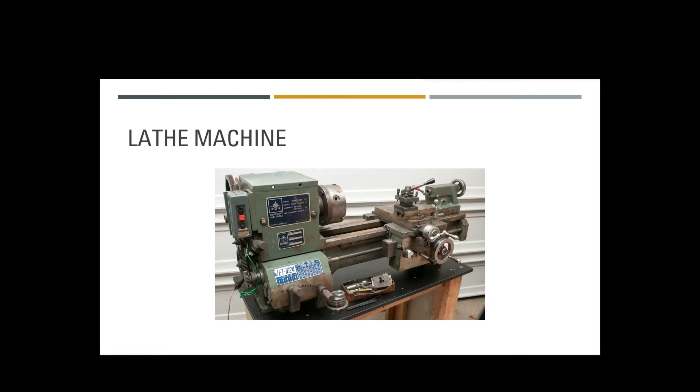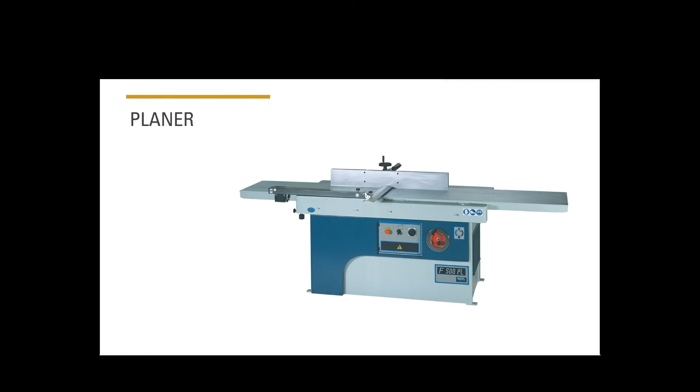Planer: machine tool used in the production of flat surfaces on pieces too large or too heavy, or that cannot be held in a shaper. The table on which the work is securely fastened has a reciprocating motion.

Grinding machine: a machine tool in which an abrasive wheel is used as a cutting tool to obtain a very high degree of accuracy and a smooth finish on metal parts, including soft and hardened steel.

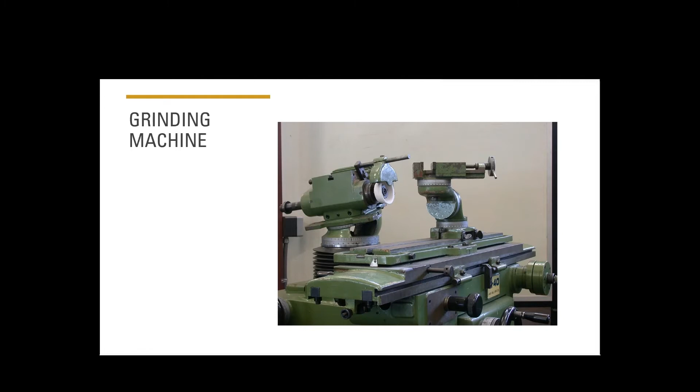Vertical boring mill: a machine tool purposely designed for finishing holes. The work table revolves on a vertical axis, and the cutting tool is arranged above the table and may be fed laterally or up or down in any position.

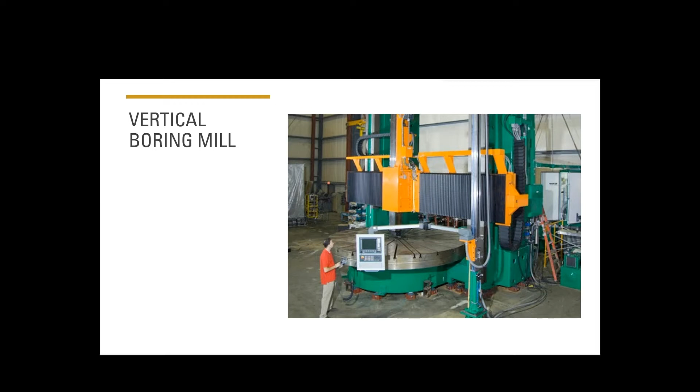Horizontal boring mill: a machine for finishing holes where the cutting tool revolves on a horizontal axis. The spindle which carries the cutting tool may be fed longitudinally through the spindle head, and in more recent designs, the spindle head may be fed vertically.

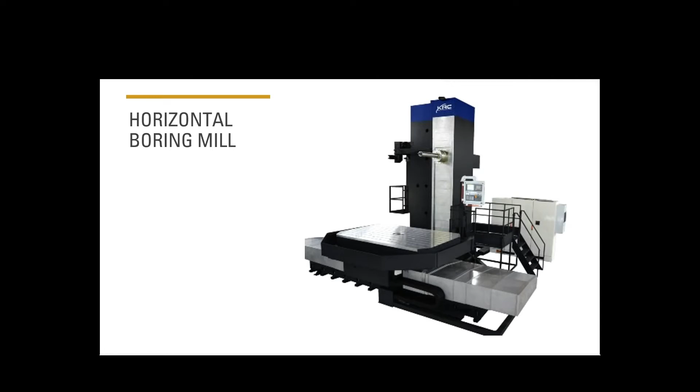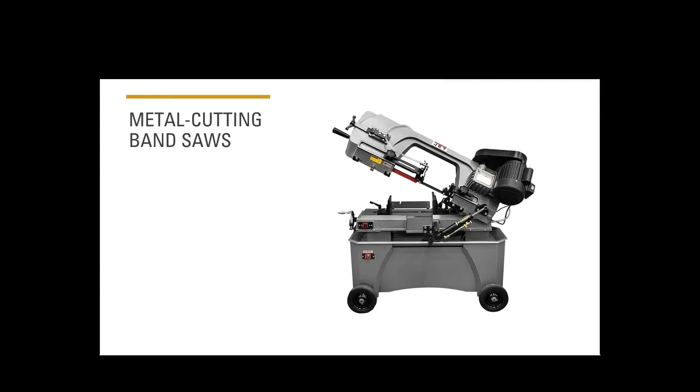Metal cutting bandsaws: a machine tool designed to cut all the time because it employs an endless band with sharp teeth moving in one direction. There is no backstroke. It cuts directly to layout lines, and can saw, file, and polish work to completion using the proper band tool.

Special tools and machinery in a machine shop of a manufacturing plant.

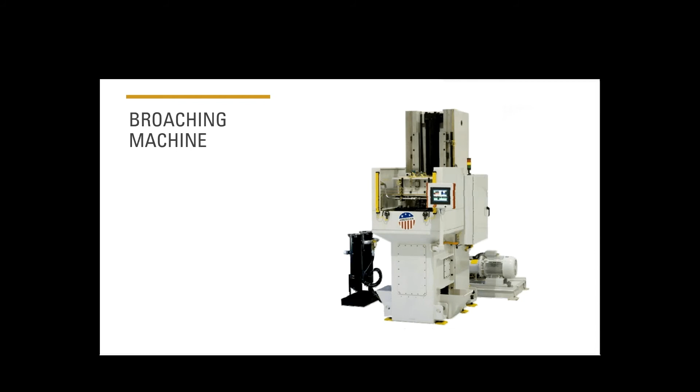Broaching machine: there are two broad classes of broaching machines available for performing almost any variety of broaching operations, the vertical and the horizontal, either of which may have one or more rams. Drives are either hydraulic or mechanically operated.

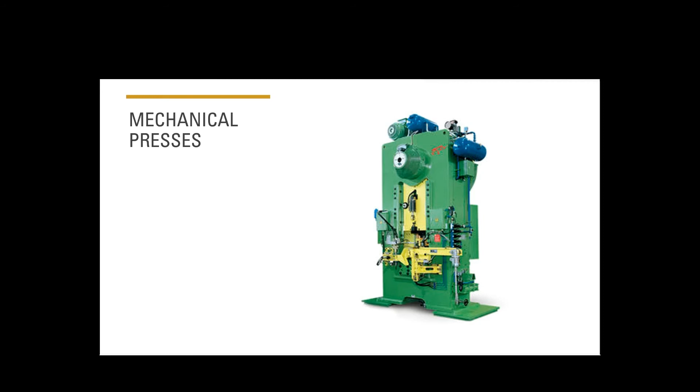Mechanical presses are classified based on the construction of the frame, the mechanism for providing motion to the ram, and whether it is provided with auxiliaries required by an automatic press.

Hydraulic presses: the available operating stroke of hydraulic presses is substantially longer than the corresponding size of mechanical press. The economical applications of hydraulic presses are used successfully on many competitive high-production deep drawing jobs. They have also found extensive use in the aircraft industry in connection with rubber dies.

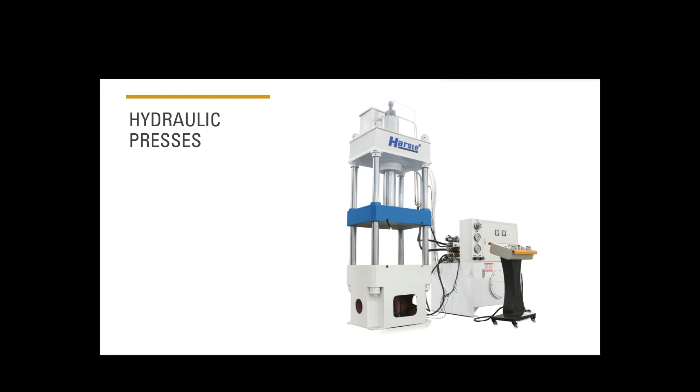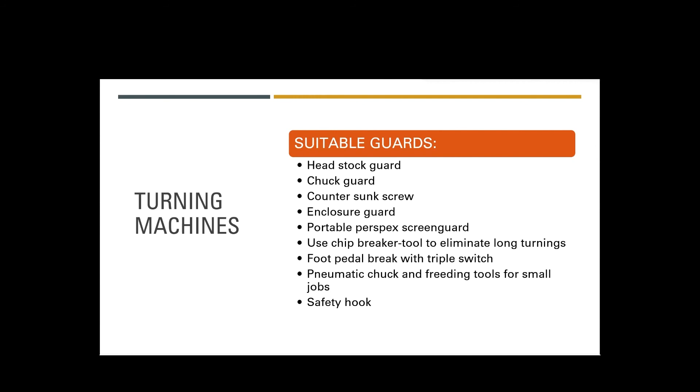Guarding of the point of operation in turning, drilling, and grinding operations. Suitable guards for turning machines include headstock guard, chuck guard, countersunk screw, enclosure guard, and portable perspex screen guard. Use a chip breaker tool to eliminate long turnings, a foot pedal brake with triple switch, a pneumatic chuck with feeding tools for small jobs, and a safety hook.